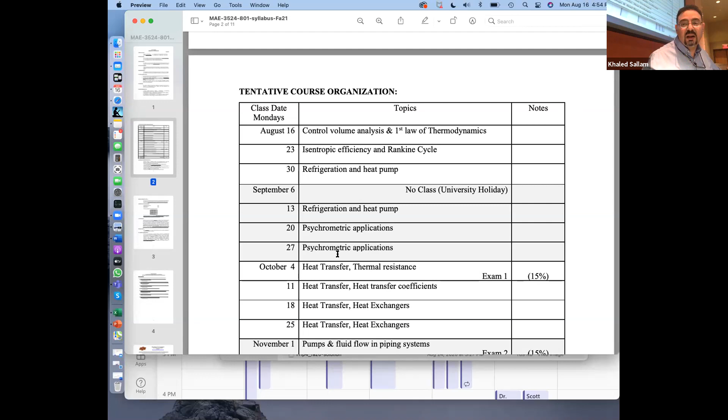So here is our class schedule that I will try to stick to. There are dates here that you should put in your calendar: exam 1, exam 2, and the final exam.

You can see the exams are 45%. The quizzes and homework are 25%. And the design projects are 30%. So that makes 100%. My A is at 85, so if you are 85 or higher, you get an A. B is 75, C is 65, and D is 55.

So now the late policy, or what happens if you miss one of the exams, especially since we may get sick, or you may be working and have to travel. A lot of students actually have to travel sometimes. So if you miss any one of those exams because of sickness or travel, you just need to tell me ahead of the game, and you don't have to prove anything to me. You don't have to tell me, well, here's my COVID doctor certificate. I don't care. You just tell me you're going to miss that exam.

And what will happen is we will just wait until your next exam, and we will see what you score in the next exam. We will use the class average between those 2 exams to calculate your score for the exam that you missed. If you miss the second exam, we will use the final exam.

If you miss the final exam, we will just wait until you come back from the hospital, because that's the only reason why you would miss the final exam. And that actually happened once: a guy crashed his motorbike on the highway coming to the exam. So I gave him an incomplete in the course, and he came back a month later on crutches in my office upstairs.

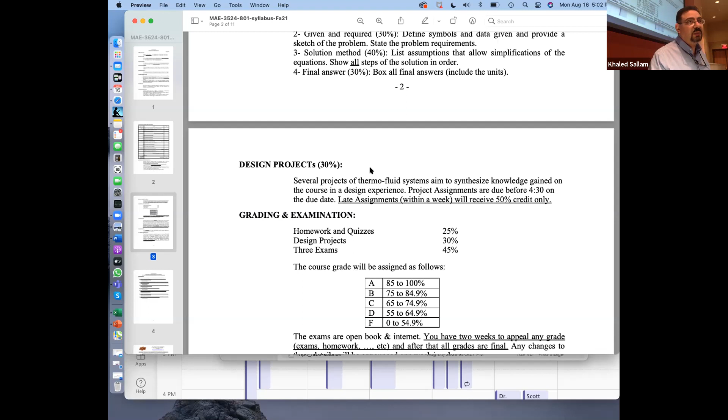So you will see that when I assign them, you will be able to see the deadline, right? So hold on, you will see it.

Okay, final thing before we leave the syllabus is academic dishonesty. So this is basically copying homework from other people.

I need to tell you that it's very, very useful to work with other people. It's useful to sit across from each other and discuss how you're going to do that homework, what equation to use. It's even good to, after you solve the problems, come back and ask your friend, what did you get for number 1? And you say 60%, and he tells you, I got 90%.

How is that possible? Show me your solution. And it's okay, he can show you his solution. And you say, wait a minute, what is that equation? All that is healthy.

The moment it becomes unhealthy is when he leaves the homework with you so that you can copy the right answer. It's okay for him to tell you, you missed this part, you have to do that equation. But it's not okay to leave the homework with you so that you can learn from it. No, you cannot learn from his homework, right? So you cannot do this.

And I am very, very fanatic about this. In many semesters I would send 15 people to the academic integrity office, and we'll have 15 meetings, and I'll spend 15 hours filing those forms and sitting in the meetings. In most cases, every student signed that yes, I did this, and it's staying on his record, because I only pick the cases which are slam dunk. So I give the student a chance, any benefit of the doubt, I say maybe he didn't do it. But the cases I pick, unfortunately every year, a lot of people get slam dunk copying from someone or from Chegg.

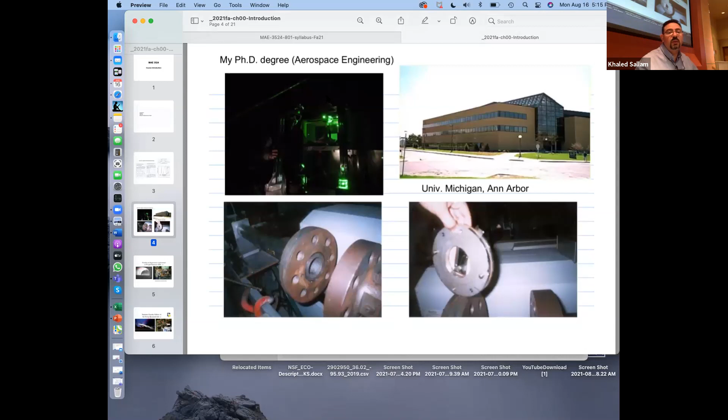And then for my PhD, I went to Michigan to do aerospace engineering. So that was mechanical engineering. And then I did it basically studying fuel atomization in high-speed flow, like jet engine, jet afterburner. And so we were using a shock tube. We will generate shock waves, and we will hit the fuel droplets with those shock waves and see how they disintegrate and what size they come up with.

And then after that I did my postdoc, which is like after you finish your PhD, you spend about 2 years doing more studies. That was at the Air Force Research Lab, that's their supersonic wind tunnel, and that's me with more hair and way younger. And you can see this is from my experiment, where you would send supersonic flow and send the fuel jets. That's really in the internal part of a scramjet engine, where the flow is moving supersonically, and you're supposed to inject and combust the fuel in supersonic flow. And all those optics on the table were because we were doing holography, taking 3D images of the spray inside the flow.

And then I was summer faculty in the Air Force for one summer doing work on scramjet engine. And then I came here in 2003.

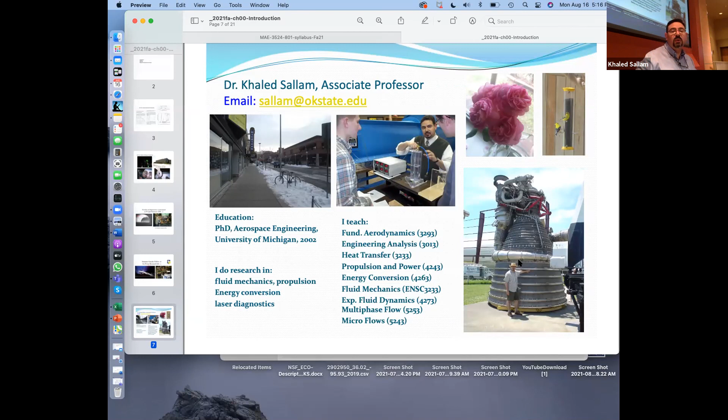I would like you to make something like this, a slide like this. This will be the first problem in your homework: one slide in PowerPoint that will introduce yourself to me. It has to have a clear picture of yourself, your email, whether you have an associate degree, and what you are interested in. Here I say what I do my research in. You would say what you are interested in, maybe your career job, what you would love to work on after you finish. Maybe tell me the courses you already had so far, and some cool picture of the things you like to do for fun. That would be an introduction of yourself to me, so I know more about you.

In this course, we will learn three things, basically three topics we are studying. So thermal fluid system, from our point of view, includes thermodynamics.

Cycles like this, all power plants, whether they are running with natural gas - this is like Jenks power plant in South Tulsa - whether they are running natural gas, coal, sun, or nuclear reactor, whatever the source of the heat, that heat is used to generate steam, and that steam goes to a turbine, then into a condenser, then a pump.

That steam cycle basically goes on and on. Every time you are turning some of that heat into work, and the rest of the heat gets rejected into the condenser, in the cooling water that goes into the river or into the cooling tower in the air. That's what defines the efficiency of a cycle.

So we need to learn how to plot this cycle on a TS diagram, how we can model it, how we can optimize it, how we can improve it. For example, why is the Jenks power plant efficiency 40%, but you go to the Owasso one, over like 20 minutes from here or less, and it's 65%? So why is this one 65% efficiency, and the one down south 40%? What makes the efficiency improve, and how we can make sure that our system is very efficient?

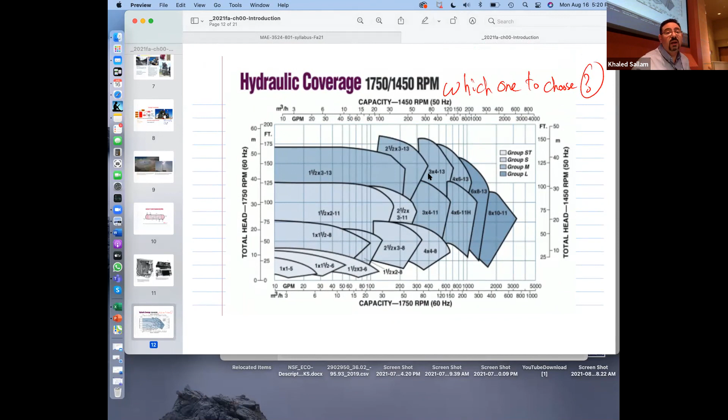The third part we need to learn is the fluid mechanics part, specifically pumps and piping for practical projects. If you are sending water through a filter system, coming back - maybe it's a swimming pool, maybe it's an aquarium, maybe it's just water going to the ground source heat pump and coming back - how do we pick the right pump, and how can we size it correctly?

Now, questions in class. I actually think questions in class are very useful, and I would encourage you anytime you think of anything to ask me a question, because there is no such thing as a stupid question. The chances are if you have a question, this thing is confusing, or I went quickly through that. Even if it was a stupid question, you will still do us a favor by asking it, because one, you give me a chance to catch my breath, and two, you make everyone feel good about themselves, because otherwise they'll think it's only them who didn't get it. So I welcome questions anytime.

The only thing that I don't welcome is interrupting me. So you wait until it's the time for question, then raise your hand, and I will tell you yes, you had a question, and then you can ask a question. Yes, go ahead.

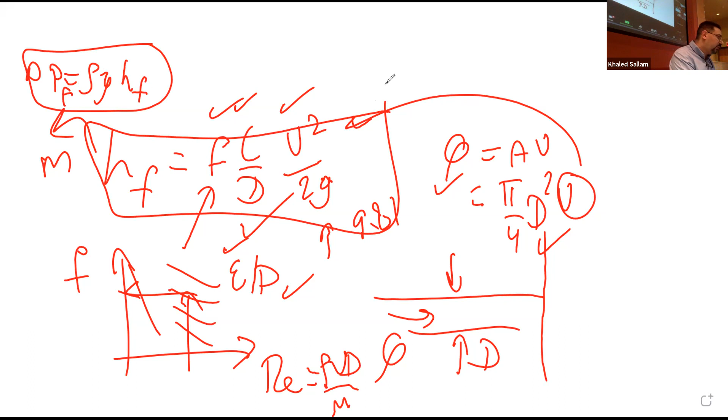Maybe remember a few things. This comes from here, maybe I need to remember the continuity equation. But that is a homework problem. So now what is a design problem?

A design problem would be: we don't know what diameter, we don't know what pipe. We don't know the diameter, we don't know the material. All we know is that they want to deliver the water from this place to that height, and they want you to pick the pump for it.

So there are choices here. What material? Should I make this out of gold? No, too expensive. Should I make this out of wood? No, it will not last, right? So you need to go and Google what do they make pipes of. And you would say, well, they do it with cast iron, they do it all the time, maybe other materials. Well, what is right now, is there PVC? Will it take that pressure? Let me try. PVC is cheap, cast iron is more expensive, but which one will take my pressure? You make a choice based on what is being used currently, right?

And then there's one part where you just have to be realistic when it comes to the diameter. Should I make it that small because that's really cheap pipe? Well, maybe if you are sending water from your garage to the backyard, you can go this small. But if you are sending it across the city from one reservoir to the city tank, maybe it needs to be a little bit bigger. How big should I make it? Again, you go to what is really practical, right? So there are things that depend on what is the state of the art, what material people are using. Maybe you wish there was something that will never rust and is so light and so powerful, but it does not exist. So you just pick the next available, right?

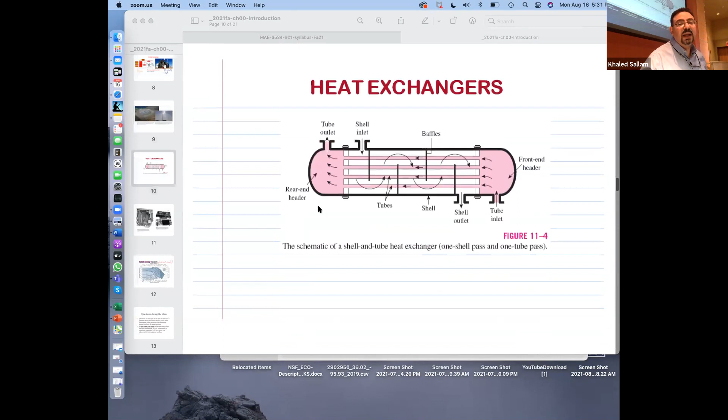But for example, if I make the diameter this big, yes, the pressure drop will be so small, but the velocity will be so tiny that probably this pipe will be filled with fouling film very quickly, because everything will deposit in it since there isn't that much flow rate into it. And besides, it will be really expensive. So that's basically the bottom line, that the problem is a little bit loose. Engineering design is a decision-making process.

That's the point, you have to decide. Of course, the more experience you have, the job becomes so much easier for you. I have one of my friends who worked in HVAC systems for buses.

And so it's very easy for him, you just tell him the bus size, he will immediately tell you what machine, what HVAC unit you need, because he did those exercises so many times. We are not there yet because you are still junior, but we are hoping that you get to that level.

So, the decision-making process draws principles from engineering and other fields, and the constraint on the system is not always efficiency or numbers you can calculate. Sometimes it's just, this is too expensive and I cannot make it, so we'll be happy with a cheaper option because it's affordable. For example, I know for sure that if my car flips, I'm dead, but I'm not driving a Hummer because it would be way too expensive. So I made a decision that if I drive safe enough, the chances of flipping my car would be small enough that it's safer to have this one. So economic, safety, environmental impact, for example.

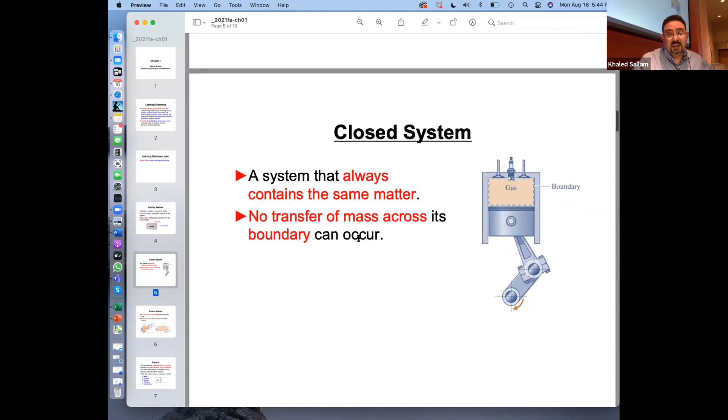So here's an example of a closed system where the gas is basically contained. Energy is released from the combustion, and that energy transfers into work by pushing on the piston. So heat transfers to work, and some of that gets dissipated to the wall as heat rejection. But no mass crosses the boundary of a system, that's what a system is. A control volume is when things continuously come in and leave, fuel and air come in and exhaust leaves, so that becomes a control volume.

Very good. So properties of the fluid, the working fluid or material, are mass, volume, energy, pressure, temperature. Some of those are intensive, they are, no matter how small you divide the system, you still have the same temperature. But the mass is not, like if you cut them into half, the mass divides into two halves.

So specifically for steam, we can define the state just knowing two properties, right?

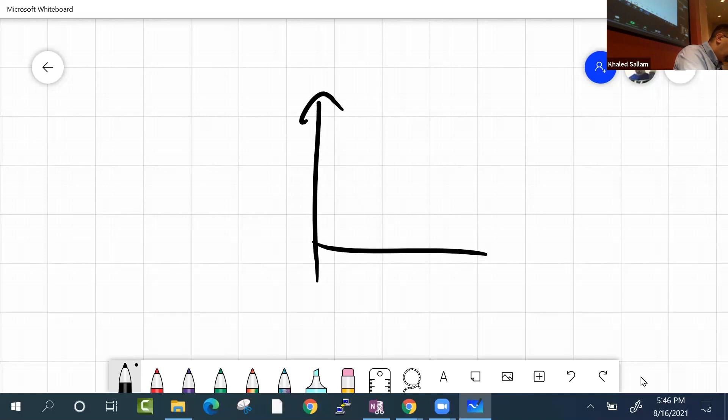Everyone knows what a TS diagram is, right? In case you don't remember from Thermo 1, the TS diagram of water is like this. This side is saturated vapor, and this side is saturated liquid. A liquid at room temperature, which is about 20 degrees C,

and atmospheric pressure, which is how much? 1 bar. This is 1 bar, will exist here in this place. So if you are existing in that region, you are not saturated liquid yet, you are not hot yet. How hot does water need to get in order to boil? 100 degrees at 1 bar, right?

So this point over here is, sorry, 100 degrees C. So at 20 degrees C, you are here, and at 100 degrees C, you will be here. And then if we keep heating you more, what will happen?

You boil, you start moving in that dome. What happens when you move in that direction? What changes? Your X, your quality, right? So the quality here X is 0, and the quality here X is 1 along this liquid, the saturated vapor line.

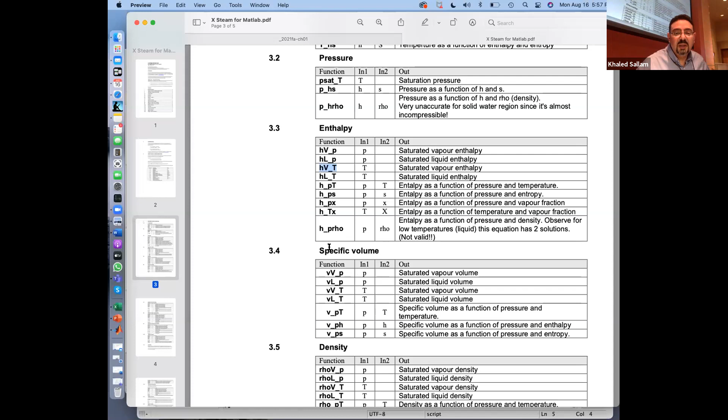So now this is always there for me, and I can make it bigger, I can add to it, I can use it later on. Okay, so you can see how he's calculating different things. He's calculating the quality from the pressure and the enthalpy. He's calculating the entropy from the pressure and the enthalpy, right? What if I want to calculate other stuff? I just refer to the manual, looking at all those codes. This is the manual of Xsteam, and it's on our Canvas webpage.

So for example, if I want to calculate things for saturated liquids or saturated vapor, let's examine, I want to use this, calculate this H. What is that H called? Did we call it HG or HF?

Tell me, you have seen the TS diagram before in Thermo 1. You did, right? Yes? Many years ago, I know, but you have seen it. So you should remember, was it called HG or HF? HG, good job, HG. So this is HG and this is HF. Right? HG and HF.

For saturated properties, you only need one property—you don't need both pressure and temperature. It's enough that you know the pressure. So for any pressure, whether it's 1 bar or 10 bar, you can calculate this HG or HF. Same thing for entropy or specific volume. You get those saturated properties just by using the pressure or the temperature. So how does MATLAB do this?

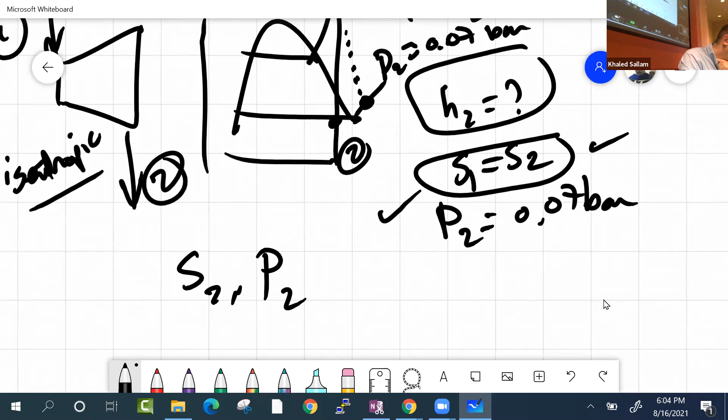So the first property—say the pressure, P2, is given as 0.07 bar or something. So given P2 is 0.07 bar, and given that S1 equals S2, S1 will be given from doing stuff on the top. So now we have S2 and P2. So how do you know whether that state is inside the dome or outside—whether it's wet or superheated? How do you do that?

Say that again—I don't have H2 yet. So the whole goal is to find H2. The only thing I know is S2 and P2. The reason I want to know whether I am inside or outside is to calculate H correctly. So how do I know if I'm inside the dome and wet, or outside and superheated, from this S2 and P2? That's the only thing you know—how do you tell from S2 and P2?

Using the table, Nick is saying. How can I use the table to find if I'm wet or dry? What part of the table should I use?

The steam table basically has pages for different pressures. Let's say there's a page for P2 that says P2 is 0.07 bar, and then the rest of the page is degree C, with several lines. This is the superheated steam table. So you basically say, here is 40, here is 60, here is 80, and you get all the other properties.

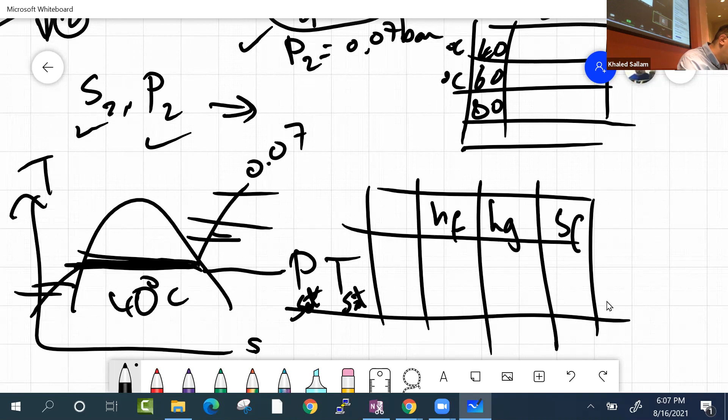For that P and T, they call them not just any P and T, they call them P saturation and T saturation. Then you will have HF and HG, SF and SG, UF and UG. Those are the two extremes, liquid and vapor, of each one of them.

And if that table is really nice to you, he will also do HFG and SFG. What is HFG? It's HG minus HF. He's so nice he doesn't want us to even do the subtraction ourselves, he will substitute it for you, because we're going to use that number so frequently. So he's like, let me just give it to you.

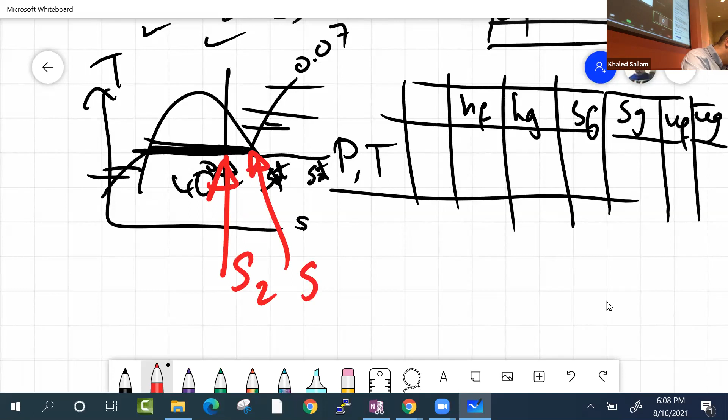Okay, so knowing that those things exist, back to our question: how? You compare your S2 that is sitting over here, hopefully, with SG and SF.

You will see if S2 is bigger than SG, then you are superheated, or if S2 is smaller than SG, then you are wet. Is S2 even smaller than SF? Maybe you are actually here then. So this region we call it what?

Inside you are saturated, over here you are superheated, and here, if you are to the left of the curve, you are cold.

What's the name for this region? It's called sub-cooled liquid, or compressed liquid, either one.

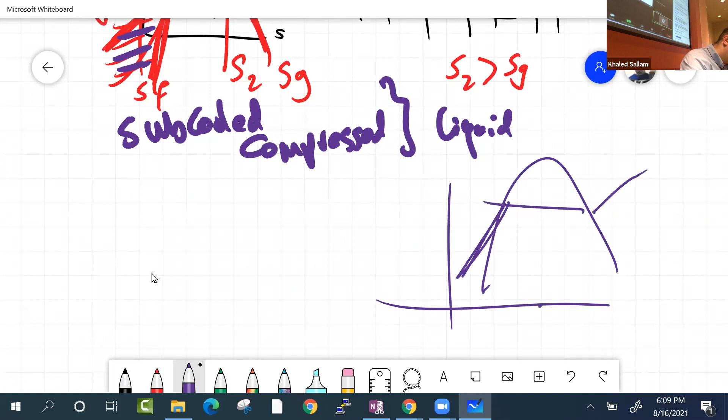Why do they call them that? Because at this pressure and temperature, you're supposed to be here. But if we take you from this T saturation that corresponds to your pressure and put you here, we cooled you. You end up being in that place.

For example, at 1 bar, if you are at 100 degrees C, you are saturated liquid. But if we put you at 40 degrees C, you are subcooled. You are not saturated, you are actually subcooled. So the thing in that region is called subcooled.

And why do they call it compressed liquid then? For the same reason. If you are here at 1 bar and 100 degrees C, that makes you at this point, saturated liquid. What if we increase your pressure, and put you at the same 100 degrees C but at 10 bar? Where will you end up? You will end up here. So that is compressed liquid.

Liquid with pressure higher than, or liquid with temperature lower than T saturation, either way you end up going into that subcooled liquid region.

Now, the last thing I want to say about this subcooled region is that when I'm plotting the pressure over here like this, at different pressures, a pump will take you from here to here, and another pump will take you from here to here. This is exaggerated so much. Those lines on the subcooled region are actually so close to that line.

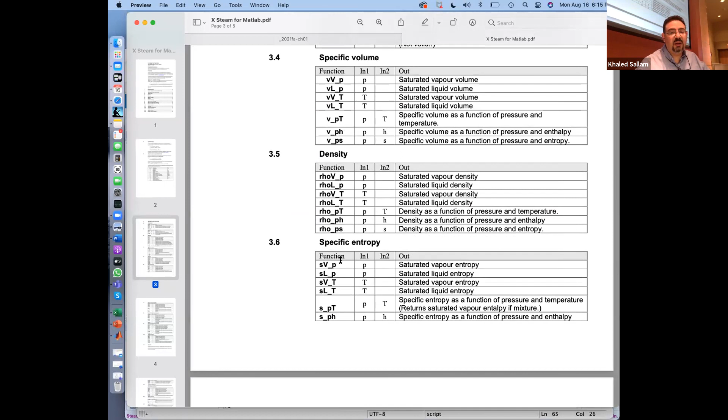So do we need to memorize all this? No, we just need to know where the file is, and every time we need a property, we come here and ask ourselves: what do I need? Do I need the density? It's rho. Do I need the specific entropy? It's S. What do I know? Do I know pressure and temperature? Then I'll use this. No, I don't know pressure and temperature — I actually know pressure and enthalpy, for example. Then I'll use this, and give it the actual numbers. I always look at that.

Not just you — a lot of people. I had really good students confess after the course that they had no idea what a TS diagram was and didn't know what saturated liquid meant. It's never wrong to ask about anything you don't know. What's wrong is not solving the problem. If there's anything you don't remember, chances are half the class doesn't remember either, and you'll do everyone a favor by just telling me, explain this better, I don't remember that part, I don't know how to do it.

Can you explain it? So all I want you to know at this stage is that the boiling or condensation of liquid happens along a constant pressure line in the boiler. This section we call the subcooled section, this is called the wet section, and this is called the superheated section. We will solve a lot of problems over this. For now, it's enough to know that you need temperature and pressure to define this point. Once you know that point, you can use those two properties to get everything else: enthalpy, entropy. We will solve problems over them today.

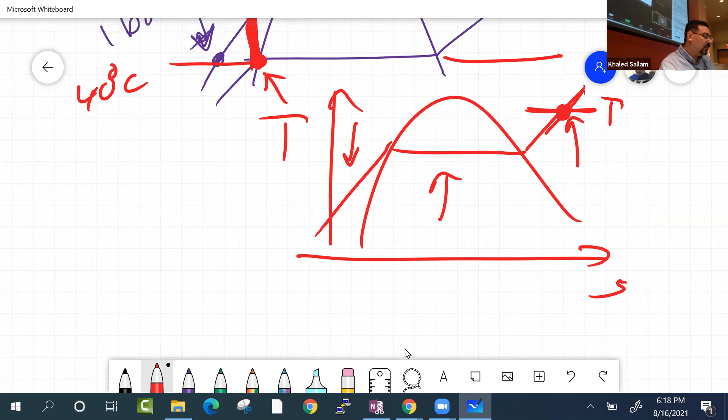Your homework will be to get the value here in MATLAB, for example, and use it to calculate, say, the work of a turbine or something. We will see that, right? So on the TS diagram, two properties are enough to define a state.

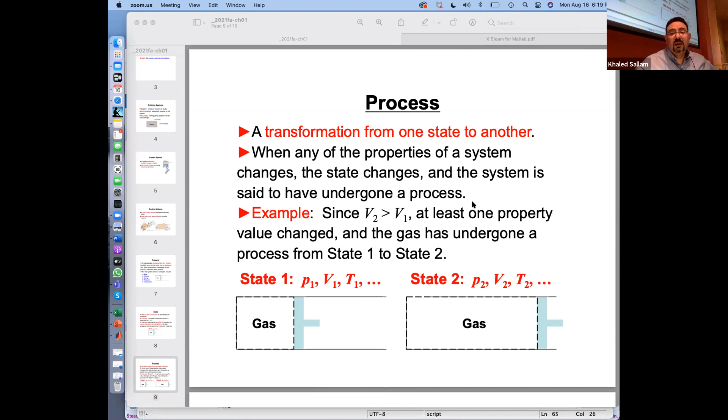All right, so now that process, whether we expand in a turbine or heat in a boiler, that's called the process. Some processes are called isentropic if they are vertically downward on a TS diagram. Some processes are constant pressure, isobaric, right? So the process defines the path on the figure.

Extensive property and intensive property. Extensive property depends on the mass, like the total energy. If I have all this, it will have one amount of energy, but if I divide it in half, the joules get divided. But intensive properties are things that no matter how small you fracture the material, every part still has the same value.

Equilibrium is when the system stops transferring from one state to the other. Once all the heat transfer happens inside the system, then it's in equilibrium. Its pressure is not going to change anymore, its temperature is not going to change anymore. And when the system is in equilibrium with the surrounding, then nothing happens between it and the surrounding. It's not going to get heated or cooled from the surrounding, not going to expand or get compressed by the surrounding. You basically reach steady state. That's equilibrium.

The units - never mix and match units, right? A lot of students, you'll be surprised how many lose their A because of units, because in order to get an A, you have to get your answers correctly. So usually it happens because you mix the units, especially things like kilojoule and joule - don't mix. So you stick with joule; meter and centimeter doesn't work, right?

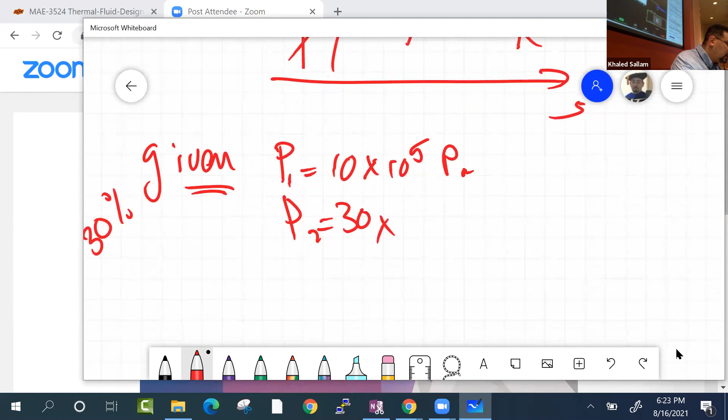So by putting this section, you are forcing yourself to decipher the problem statement: you would say P1 is... and if it said 10 bar, I would say 10 times 10 to the power 5 Pascal - what is going on, 10 to the power 5 Pascal. So I wouldn't write anything in kilopascal, for example. If you say P2 is 30 kilopascal, I would write 30 times 10 to the power 3 Pascal. If the temperature is 200 degrees C, I wouldn't write degree C - what should I write instead?

The temperature should be in Kelvin, the pressure should be in Pascal. If he gave me any length, like in centimeters or something, I immediately convert. I mean, I don't have to multiply or divide, but I just have to write it like this, so I remember.

There was a really funny incident that's still stuck in my memory from when I was doing my exam one year. He was giving us the pressure, P1 is like 30 kilopascal and P2 is 20 kilopascal. Of course, I wouldn't write kilopascal, I would write 30 times 10 to the power 3, and 20 times 10 to the power 3.

While I was reading the problem and writing this, I knew it was isentropic expansion. What's isentropic expansion? When you drop like this on the TS diagram. So if you have a gas going through isentropic expansion, you go vertically down. Isentropic expansion means S1 equals S2, right? No change in entropy.

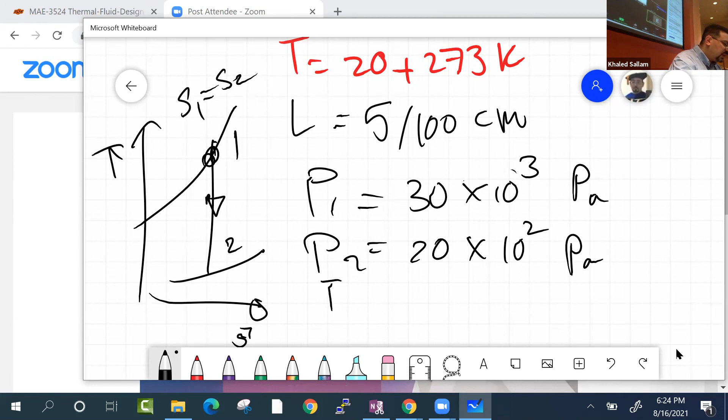He was giving us T1, 20 degrees C, and asking for T2. So I knew I'm gonna use that ratio thing: T over T equals P over P to the power gamma minus 1 over gamma. You remember that part? In isentropic expansion of a gas, T2 over T1 equals P2 over P1 to the power gamma minus 1 over gamma. And I know the pressure is gonna just be the ratio.

So it doesn't really matter whether it's in kilopascal or Pascal, because the units cancel. But when I was writing what's given, I was telling myself, you know, it wouldn't matter, right? And then the other part of my brain said, shut up, we said we're gonna stick to SI, we'll stick to SI.

Then in the solution, I was like, T2 over T1 is P2 over P1 to the power gamma minus 1 over gamma. And I was like, are you crazy? Are you actually gonna write it down? And I said, yes, I'm gonna do this. Shut up. So I'm doing this, pulling my calculator, and I still remember that conversation because it took a lot of my brain power at that time.

I was like, so are you really gonna multiply by 1,000 and then divide by 1,000? You completely lost your mind. And then I said, no, I'm not, but just, I'm gonna cancel over here. But we said we're gonna stick to SI, let's stick to SI. So I was religiously sticking to never writing anything in my answer sheet except in SI.

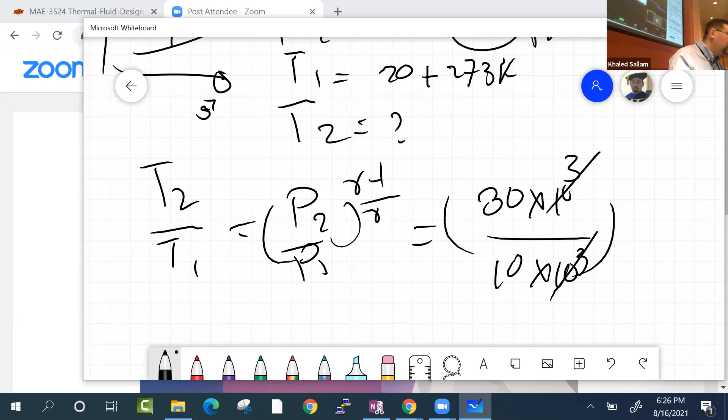See, I wouldn't have made this mistake if I was working for them. So it really pays to stick to consistency, though sometimes it's not that clear, for example with the English system. Of course, to start with, you can use English units. I'm not just saying let's use SI, but let's be consistent. So I can use pound force, I can use feet, and I can use slug. If I stay with those units for force, length, and mass, I'm fine.

What's not okay is pound mass, don't use pound mass. What's not okay is PSI... is PSI okay? Pound per square inch, is that okay to use for pressure? Yes or no?

Is that standard? No, it's not. Pound per square inch is not. What should I use then? I should use pound per square foot, right? No inch, no centimeter. Meter or foot, right?

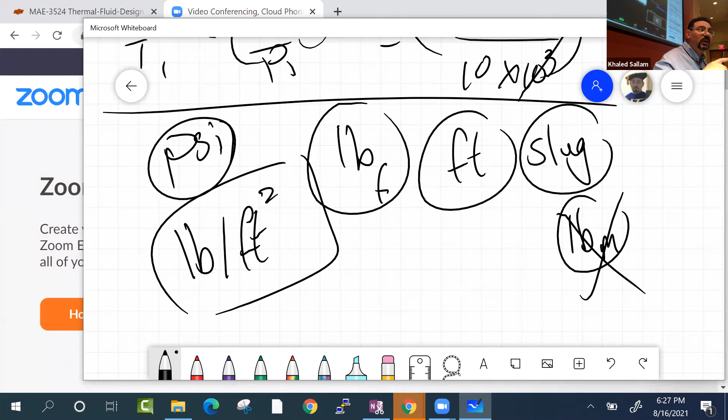Pound force or Newton. So you stick to one family of units, but you stick to the standard units of them, and you will be okay. All the equations will work, right? But you don't mix and match, and you don't use millimeter. Even if the number is really silly, say the length is like 5 millimeters, do you really have to multiply by 10 to minus 3 to make it meter? Yes.

Okay, so back again to solving the problem. So when you write what's given and what is required, you get 30%. And this will be graded on a scale of 1 to 4. So 1, if you miss them, you still get 1. 4, if you do them correctly, you get 4. 3, if you miss one of them, and 2, if you miss a lot of them, I guess.

The reason also why you need to write what's required is because a lot of the time people just read the problem so quickly and don't remember or don't notice everything that's required. I remember one of my students, he was really good, very good student. In the final exam, I usually give 3 problems, but that particular year I gave 4 problems and he didn't even flip the page to see there was one more problem. He lost a lot of points over it, but I just cannot forget that. So reading what's given and what's required in every exam is really important. Take your time and write them down.

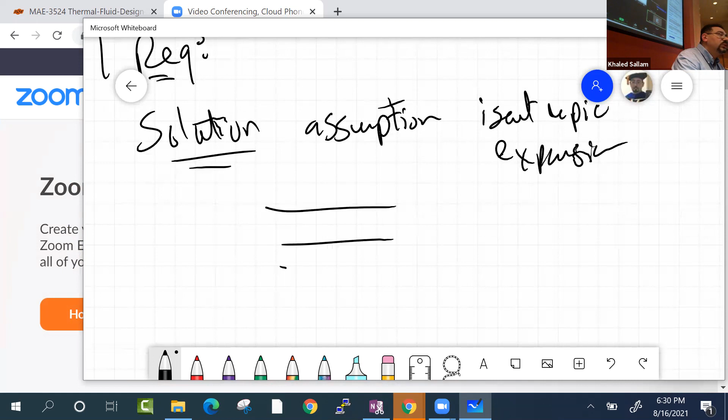And that will be worth 40% of grading any problem. And finally, the final answer that you're going to just put over here, say the efficiency is 0.4 or P2 is 40 kilopascal. Of course, the unit over here is the unit that the customer is asking. If the problem says calculate this in degree centigrade, you don't say no, I'm going to calculate Kelvin because degree centigrade is not standard. No, you do the calculation in Kelvin.

But then when it comes to the final answer, you just convert. The same thing when we do any project for any company: we do our thing in SI, but then if they want the thing in horsepower, we convert at the end to horsepower. Just divide over 746 and it will get converted. But you do your calculation in SI, you convert at the last end. So that final answer is worth 30% of the problem.

So again, every one of those is graded on a scale of 1 to 4. So when you get your homework back from Beben, he will tell you problem number 1: 4, 4, and 3. So you said what's given, what's required, you did the right equation, but the final answer was slightly wrong. That's why you got 3. If the final answer is not there, you will get 1. So you get, say, 4, 4, and 1. If the final answer is there, but it's totally wrong because you totally used the wrong equation, you probably will get like, say, 4, 2, and 2.

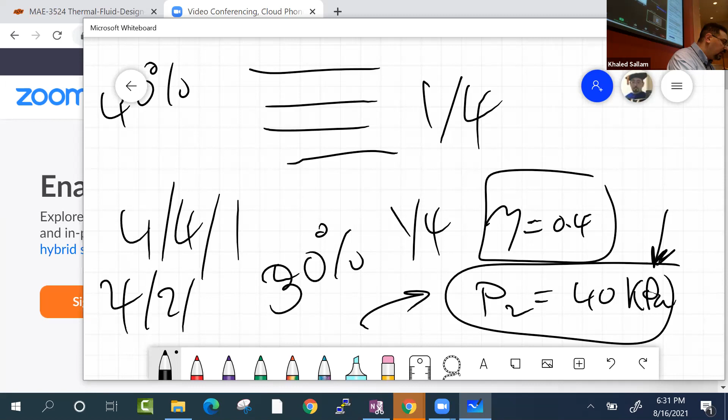Okay, so 4, 2, and 2, that means you have what's going on, what's given, what's required. You use the wrong equation, and that's why you end up with a horrible answer. 4, 2, and 1, you have the wrong equation, and you didn't even manage to get the final answer out of it.

Does this make sense? So when you look at this, it will end up showing that eventually, if you never really get the right answer, you get a B. And I think that's really fair. I mean, imagine if someone, for whatever reason, never gets the right answer.

You ask him, what's your phone number? He gives you the phone number wrong. Where do you live? He gives you the address wrong. I mean, we need to mark that person with something so that we can warn the outside world never to let this person work alone. That person needs someone to check his calculation. I mean, he knows the procedure, but we just need someone to check the number. So that's our B student, right?

And if you don't even know the correct answer, you don't know anything, you should get 4, 1, and 1. And when you calculate this, you will actually get a D. So 4, 1, and 1, what does that mean?

You are pretty good at English. You understand when someone talks to you, you understand what they want from you, right? But you don't know how to do it. That's why you get 4, 1, and 1. So you get a D, and you should work as an assistant in the office or something.

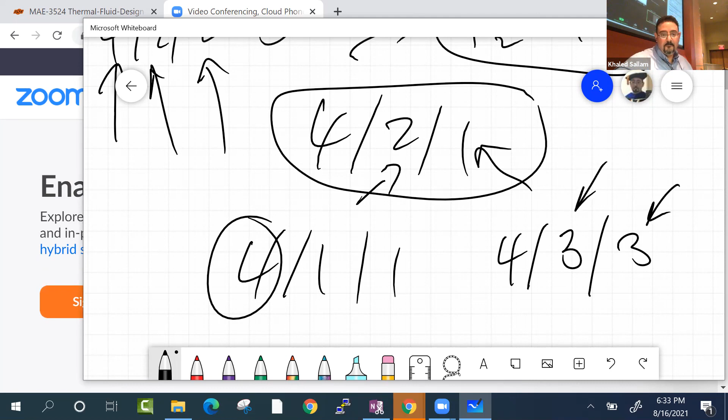Okay, the design project will be a little bit different, right? Because it will involve more requirement than just calculation.

Okay, so he's talking here about the different units that we should use. Pound, force is okay, foot is okay, right? Second is okay. In this English unit, in SI, of course, kilogram, meter, second, Newton. Make sense?

Pascal is the pressure, that's Newton per meter square. 1 bar is 100 kilopascal. And one atmosphere is how much? What's the atmospheric pressure? 1.01... Right, bar, 1.01325. So 1 atmosphere is a little bit bigger than 1 bar. 1 bar is 100 kilopascal, and 1 atmosphere is 1.01325 bar. So we use this, we don't use this. We don't use PSI, we use pound force per foot square.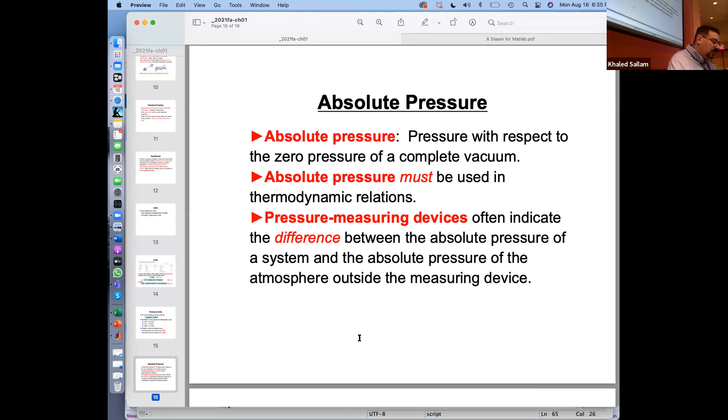Okay, absolute pressure and gauge pressure. I remember when I was a junior taking my fluid course, my only problem was, when do I use absolute pressure and where do I use gauge pressure? That was so confusing for me. So when do we use absolute pressure? When do we use gauge pressure?

When it comes to the equation of state, P equal rho RT, this should be absolute or gauge? Anyone? The pressure should be an absolute value or gauge. What is absolute or gauge?

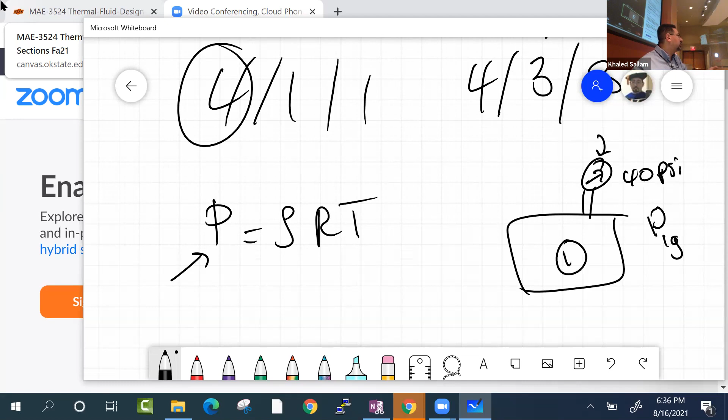For example, if I have a tank like this, and this tank has a pressure gauge, and that pressure gauge is saying 40 psi, that is 40 psi above the background pressure on that gauge. He's measuring the gauge pressure. So if this is P1, this would be P1 gauge. When you measure the pressure in your tire, it's 40 or 35 above the atmospheric pressure. So if there is absolute 0 over here, and this is P1, and this is P atmosphere, then this would be P1 gauge, above P atmosphere.

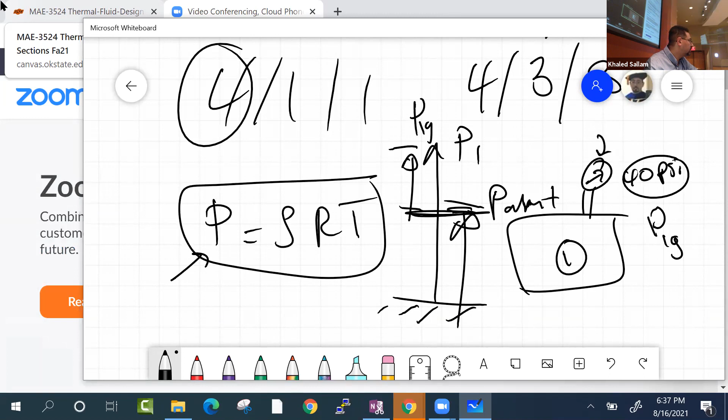So when this guy said that the pressure is 40 psi, and then you are using that pressure to calculate the temperature inside the tank using the equation of state, should I use the 40 psi gauge or should I add 1 atmosphere to it? Gauge or absolute? Absolute, yes. This has to be absolute. Why? Because the equation of state really cares about what is the pressure inside this tank. It doesn't care what is the pressure outside or how high we are outside. I don't care if we are at the bottom of the ocean or on Mars. If you have that pressure inside, the equation of state should tell you the temperature of the fluid or the gas, right?

So when it comes to the equation of state, when it comes to the TS diagram, when we are trying to say a turbine expanding or a pump working from this to this, that is the absolute pressure. When do I use the gauge pressure?

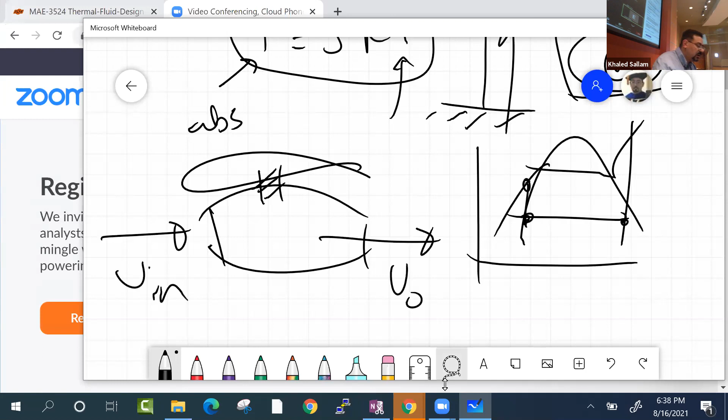For example, when I have a jet engine sitting under a wing over here, and the flow is coming like this and leaving over here, this is V in, this is V out, and someone is asking you to calculate the thrust of that engine. And what is that? You are trying to calculate the thrust equation, and you're saying that the thrust is m dot times V out minus V in.

But then you need to also add the force, it's not only the thrust, there is also pressure force acting on the control volume. This is my control volume. That engine is called the control volume. Things are coming, things are leaving. That's called the control volume, not a system. There's crossing the boundary. And the force that's acting on it is not just the thrust, but also P1.

I mean, let's call it P1 first. Then later I'm going to tell you we're going to use P1 gauge. So P1 area 1 and P2 area 2. Is that the only force that is acting, or do you see other forces that are there? Any other forces there too that I'm not showing on my sketch?

What about this? Isn't there forces here too? What are those forces acting on the engine's wall? Pressure force, right? But this is probably the atmosphere. There's probably the atmosphere everywhere, actually, including here too.

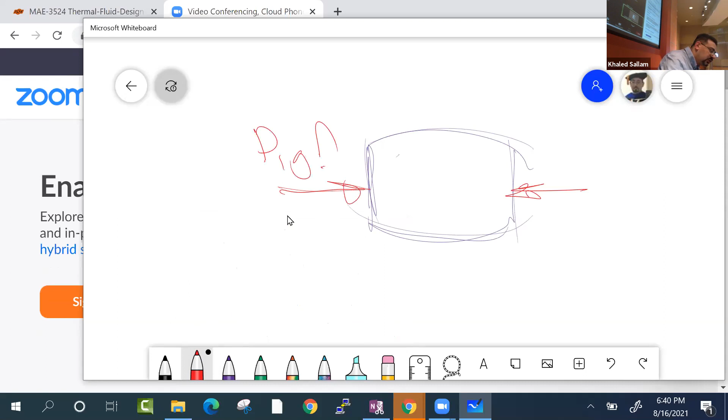So in our sketch, we will just plot things that are... we'll just measure plotting that are above the atmosphere. So we subtracted the atmosphere from everywhere. And here is V1 and here is V2. And here is the force coming from the wing, holding the engine.

And so now I define this positive direction and I write the momentum equation. I write the momentum equation for this, and I would say P1 gauge times area 1 minus P2 gauge times area 2 plus the thrust equals m dot times V out minus V in.

Okay, and that's how I can calculate the thrust. So we use gauge pressure when we are trying to cancel the atmosphere from everywhere, then we use the pressure on top of the atmosphere.

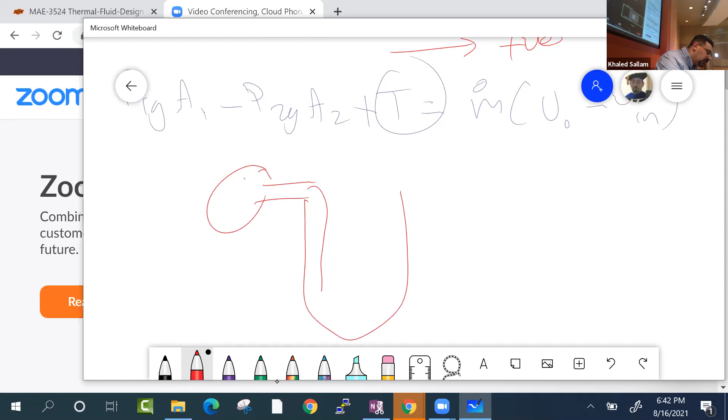Also, like in a manometer problem too. Imagine if you have a pipe like this, and then you are measuring the pressure with a manometer over here, and it's like that. So when you calculate that pressure difference, say this height is h, you'd say P1 gauge is rho*g*h, because you are measuring it with respect to the atmosphere. One side is open to the atmosphere, and you are measuring it with respect to the atmosphere.

So absolute pressure when it comes to thermodynamics, gauge pressure when it comes to forces. Then we cancel the atmospheric pressure.

So I'm explaining here gauge and vacuum. The vacuum is opposite to the gauge pressure. The gauge pressure is how much you have on top of the atmosphere. The vacuum is what you have under the atmosphere. So when someone says the pressure in this tank is 25 inches mercury vacuum, that means I am lower than the atmosphere by this much.

When does the pressure get lower than the atmosphere? Condensers, for example, in a power plant, because they want to condense at low temperature, that necessarily means you have to use vacuum.

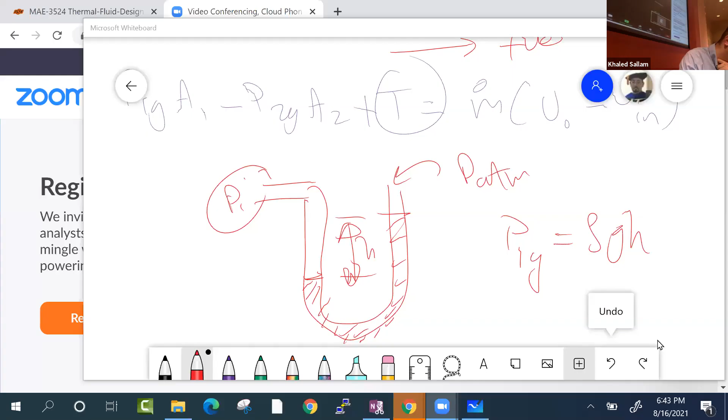Maybe we should cancel this so it can get bigger. We should cancel this, should make it on top.

Yes. So the regular power plant, the Rankine cycle, it operates on a boiler that takes you all the way up to here, a turbine that takes you down, even down here, and then a condenser that takes you to subcooled liquid, and then a pump that takes you up, and it keeps going like this. So for the turbine to go from say state 1 to 2, that work turbine is H1 minus H2. So to get this guy as low as possible, they need to take that temperature down.

Again, this is a T-S diagram. They want to take this as low as possible, say 40 degrees C. How low can it get? It gets as low as the cooling liquid that is cooling the condenser tubes.

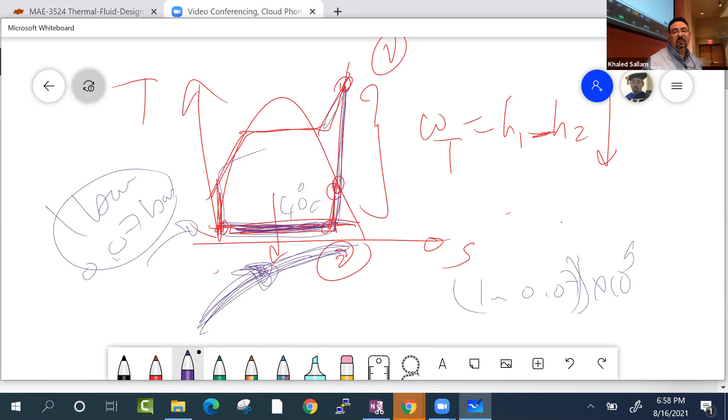So the condenser will be under vacuum, right? And they can calculate this vacuum by measuring P atmosphere minus P vacuum, okay, the absolute value of the vacuum. And that difference can be expressed in kilopascal, or it's standard to actually use mercury, inches of mercury or something, right? Or torr, they also use torr, which is a unit of pressure. So gauge pressure is above the atmosphere, vacuum is lower than the atmosphere, okay?

And we said that a good idea is we can get it from X steam if we don't want to use a steam table, just by telling it what we need, P saturation that corresponds to that temperature, right? That is the line that we should use. So over here, if we say what is the pressure that correspond to... what is the pressure that correspond to... let me make this bigger.

You guys can see on the screen, all right? At that temperature, I'm going to say 40 degrees C, right? And I have to add the semicolon so that you don't actually print. If you put the semicolon, it means execute, but keep the variable in memory, don't print it to the screen, because this is part of a bigger thing that I'm going to calculate. And then at the end, I just need to know the efficiency. I don't like to print every single line.

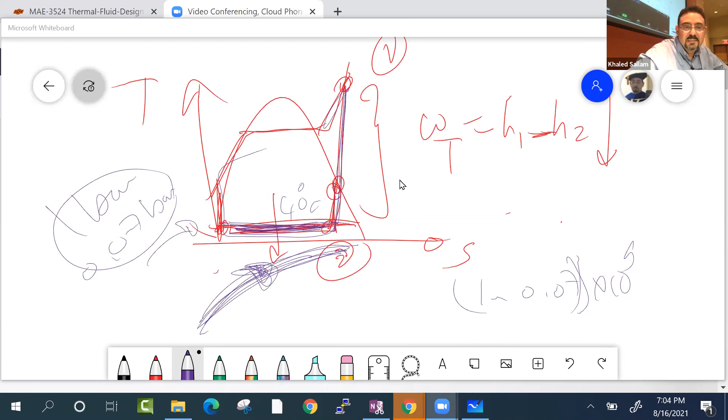Temperature scale — of course we don't use degree C in the equation of state, but when can we use degree C? What scenario is it okay to use degree C, guys? Well, so again, when we are using P equals rho R T, this has to be in Kelvin. There is no choice. But when can I use degree C in my temperature calculation?

When we are what? Yes, when it comes to delta T, that is correct. So for example, in heat transfer, if you remember the heat transfer course, Q for convection was like HA delta T, right? T liquid minus T ambient, right? So over here it does not really matter. People ask that question so many times — should we convert, like when we say T liquid minus T infinity, should we do this in degree Kelvin? No, it doesn't matter whether Kelvin or C.

But crazy as I was when I was undergrad, I don't remember that story — I just remember the pressure story because it took a lot of my time canceling the stuff. But I'm sure I was like, no, I'm going to use Kelvin, let them just subtract from each other. I don't want to get my paper spoiled by degree C. Very good.

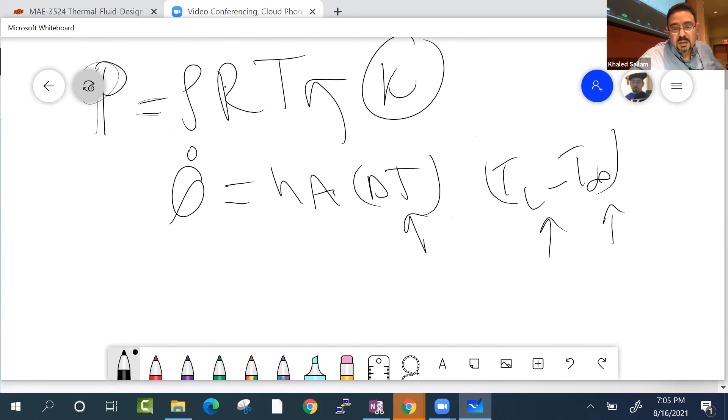Also, for degree Fahrenheit we actually use Rankine in the equation of state. And the conversion between degree Fahrenheit and degree C is super easy too. Degree centigrade is 5/9 of degree Fahrenheit minus 32. You subtract 32 and then multiply by 5/9. Or you just Google the conversion and you'll get the difference between them.

So we talked about the grading, right — about what's given, what's required, and the solution. But I would like to say something else about problem-solving skills. A lot of the time we convince ourselves that if I read the solution and understand what the instructor said, then I've got the problem. This is as if someone who read a book thinks he can write a book. The fact that you can read the book, understand it, and it's very clear what it's trying to say, doesn't mean you can write a book.

So why I'm saying this, it's not good enough to solve the problem. You have to always come up with a solution yourself, okay? Because it's the solution methodology, it's the reason why you went that way. That's what you carry to other problems, because you will never be asked to solve this exact problem over and over again.

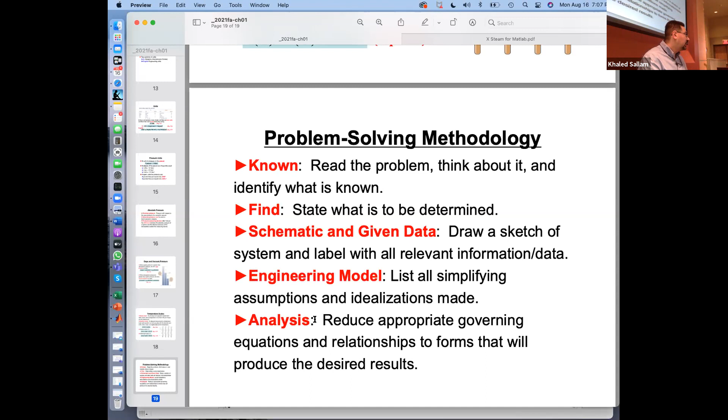But maybe in your senior design project, you will be asked to do something that involves energy conversion, and you would remember, I did this method in this homework problem because energy was conserved, it just changed form. We said those joules equal to that joules. Then when you face a new problem that has the same physics, you will follow the same procedure.

Okay, so it's never the solution, it's the solution procedure. Okay, good. Question so far?

So the question for online people is, when you say required, when you're writing the problem and you're giving 30% on given and required, what is exactly what you mean by required? So to start with, given is straightforward, right? By given, I just need to see symbols and numbers. I want you to say this: P1 and T1, and rho 1. So one funny guy sometime, like last year, he was like, in given, he pointed to the problem statement, say the problem statement was on top, and he said, given, here, the problem is given.

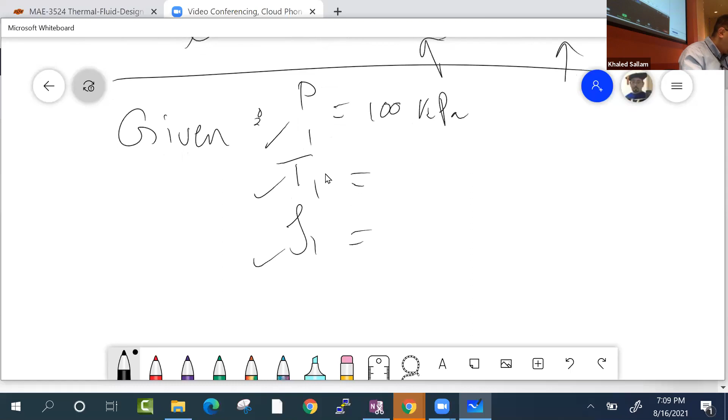No, I want you to spell out for me the numbers and the variables. Okay, so the same thing for required. I want you just to say required is the efficiency and say the overall heat transfer coefficient. It just shows me that. And maybe you want to say that the heat transfer coefficient is required in watt per meter square Kelvin, for example. So it just shows me that you know what is required. I mean, if you don't remember the symbol, you can always say the cycle efficiency, that's also acceptable.

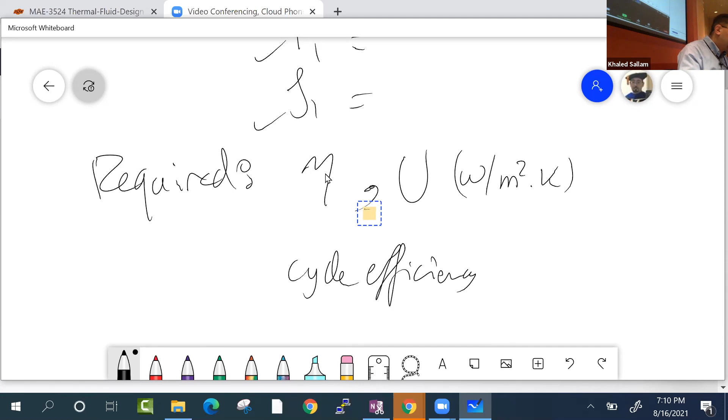But I don't expect you to say cycle efficiency if the system is operated at half the pressure. I mean, maybe that's the problem statement, we said calculate the cycle efficiency if the pressure is half. You don't have to do this, you just say cycle efficiency or eta. That's good enough. It's just a way for me to realize that you remember that there are 2 things that are required in this problem, and those are the 2 things.

Does this answer the question? It's what we are looking for. Exactly, that's what is required, straight out of the problem. You are not inventing it.

Is there a way you can find like an example of a simple homework problem? Yes, we're gonna do this. Definitely, let's solve the first homework together too, as a gift for me to show my goodwill. Okay.

We are not there yet, however. I wanna cover one more thing before we go there.

All right, so chapter 2 in the thermodynamic book, he talked about the first law of thermodynamics. That's probably the most important thing really in this course. We'll solve a lot of things just using the first law of thermodynamics.

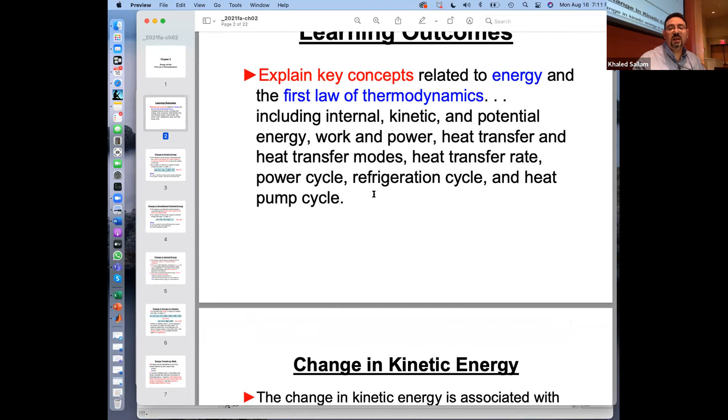Okay, so the first law of thermodynamics is simply an energy balance. It's like a budget balance for your house. How much money is coming into our budget, how much money we spend, the difference between them, if it's plus, that's savings going to the bank. If the difference is negative, that's debt that goes to the credit card. That's basically the first law of thermodynamics: joules coming in, joules leaving, and the difference is, are we storing stuff or are we losing from our control volume? Okay, and it helps with heat transfer, refrigeration, power cycle.

Okay, and so he's introducing the forms of energy that the first law is counting, or basically making a balance of. The first one is kinetic energy. Okay, so the kinetic energy of my mouse, if I throw it on you, is half mv squared, right? Half the mass times v squared.

But the kinetic energy flux going into a control volume is not just a sphere, it's a continuous flow. So if I have a jet engine or a pipe and things are coming in with m dot 1 and v1, then the energy flux is not half m v squared, it's half m1 dot v1 squared. Okay, so this would be kilogram per second, right? And this would be meter per second.

But you can tell then that v squared by itself, the unit would be joule per kilogram.

So when you multiply it by the mass flow rate, which is kilogram per second, you get joule per second. So the kinetic energy flux is in joule per second. Half mv squared, that is energy, that's joule. But half m dot v squared, that's what we use at the entrance of a control volume or the exit, and that is joule per second, not just joule.

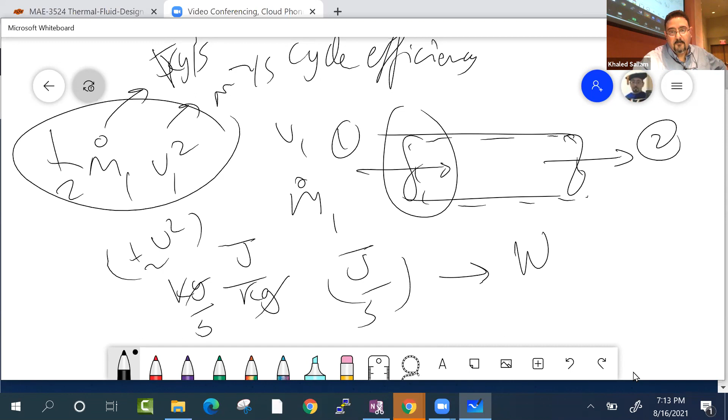Potential energy, mgz. This is the potential energy of this guy hanging there. So with respect to that datum, you have this height, that is potential. So when you drop, you lose that joules and you turn it into something else, like kinetic energy. That's why you accept that velocity.

But for a control volume, it's going to be m dot gz. And internal energy, we give it the symbol U. The specific internal energy, per unit mass, is small u, and that is joule per kilogram. For gases, that small u is CvT. For steam, we don't use CvT — we go to the steam table and get the internal energy knowing any two other properties: temperature and pressure, or entropy and temperature.

So the energy flux going into the control volume would be three things: internal energy, potential energy, and kinetic energy. And the stuff that leaves would be the same.

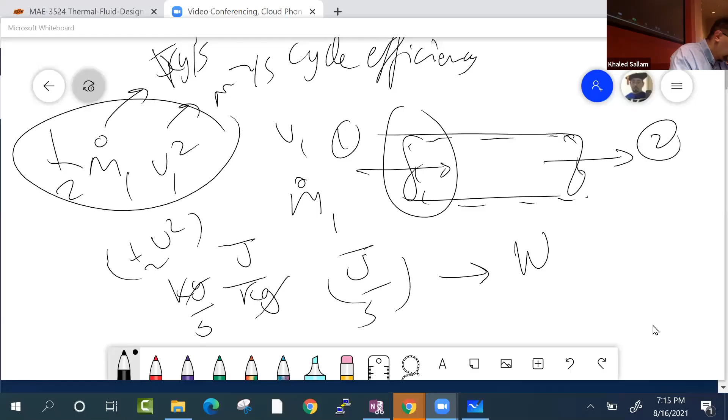So if I have a pipe, maybe a pump over here that is taking the stuff from, say, the river and sending it to a higher level over here — this is point 1 and this is point 2. And we are trying to calculate the first law of thermodynamics so that we can figure out how much power this pump consumes. To do this, I need to do an energy balance in that control volume.

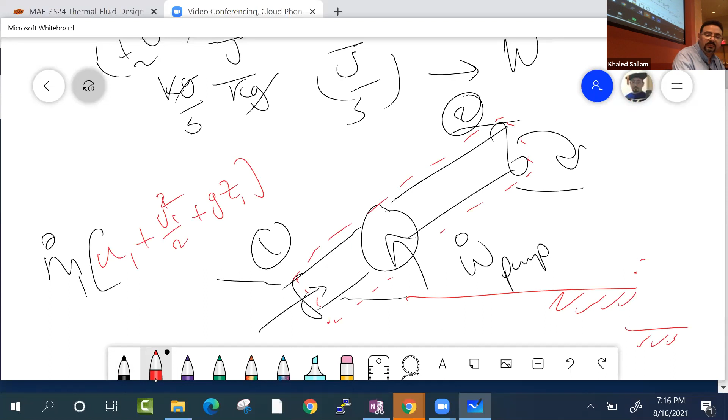I want to know what's the energy in, what's the energy out. So the stuff coming in here is m dot 1 multiplied by — I'm going to write it wrong first, it will change in a minute — U1 plus V1 squared over 2 plus gZ1. Z1 requires you to define what is Z equals 0, the datum could be here or there, you just have to define it. But the point is, this is in joule per kilogram, and this is in joule.

This is in joule per kilogram, and this is in joule per kilogram, and this is joule per kilogram. This is actually a good trick to remember: whenever you're writing a formula and things are added to each other, they should have the same units. So if you're deriving an equation and flipping from one page to another and you forgot the g, it's very easy to catch — just before you plug in the number, you check. I used to do that all the time, so I would derive my final formula, and before I put in my number, I'd check: does it really make the units the same? That's why I remember till now that meter squared per second squared is also joule per kilogram, because of how the first law of thermodynamics is written.

Very good. So those are internal energy, specific internal energy, kinetic energy per unit mass, potential energy per unit mass, and they are multiplied by the flux. The same will be on the other side. And if there is a difference between them — if the energy out is more than the energy in — it must be because of the power that the pump is doing. That is the point behind the first law of thermodynamics.

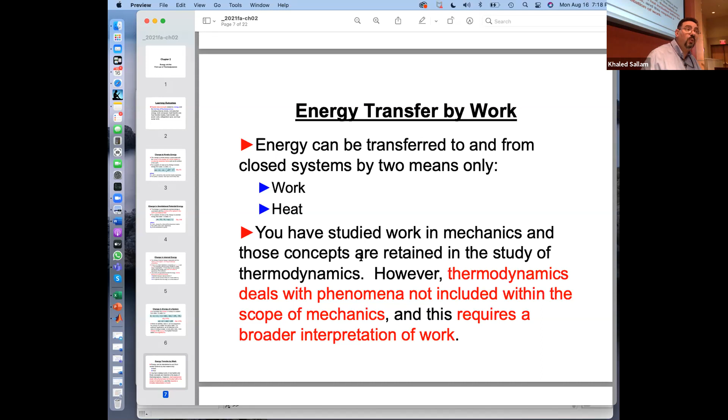So now that system, or the control volume, because it's open, can transfer work and heat to the surroundings. It can get heat from the surrounding, and it can give or take work from them, like a pump with electric power coming in. Some of the work could be compression, could be a fan, could just be electric wiring going into the control volume — bringing mechanical or electrical power in.

The sign convention of the first law is that when the control volume is actually doing work, like a turbine, the turbine does work on the ambient, on the surrounding. It has a shaft, and that shaft does work on the surrounding, which is the generator sitting outside, or the load. Then that work is a plus. So the system is useful when the work is plus, when the work is done by the system.

The opposite for the heat. The heat again can happen between the control volume, or the system, and the surrounding. We could heat the surrounding, or the surrounding can heat us. When the flow is coming to us from the surrounding, when we are being heated, that is a plus Q. The heat is positive when it's done to the system.

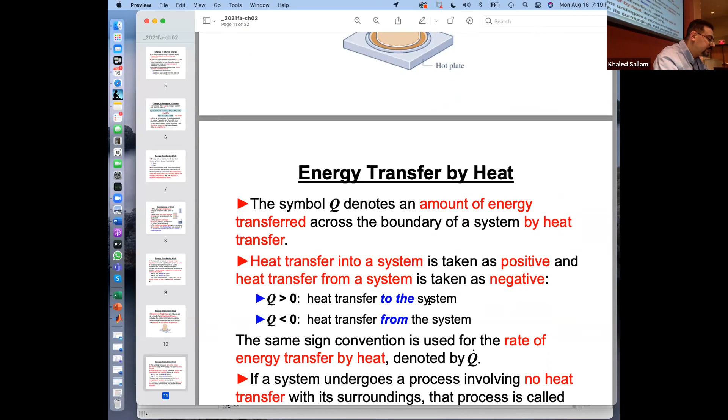So that is weird, right? You'd think because, like, you'd understand if everything going out is plus and everything coming in is negative, or the opposite. But no, they rather have it like this. If you have a control volume, then when you do heat on it, that is positive. And when it does work, that is positive.

And as a result, the first law of thermodynamics says Q dot minus W dot equal to... So Q dot minus W dot, that is the net energy. Q dot minus W dot is the net energy delivered to your bank account, right? Q dot minus W dot is the net energy delivered to you.

And so that is the reason why your output, say the output is here, this is 2, and this is 1, the input. That's why you will have more stuff leaving than coming in, right? U plus V, U2 plus V2 squared over 2 plus GZ2, minus U1 plus V1 squared over 2 plus GZ1.

So the first law is basically saying that if you have a net addition to you, that's why the output will be more than the input. Or simply, if the output is way bigger than the input, it must be because you are being given heat, or someone is doing work on you. That's why the stuff is leaving with a lot more energy.

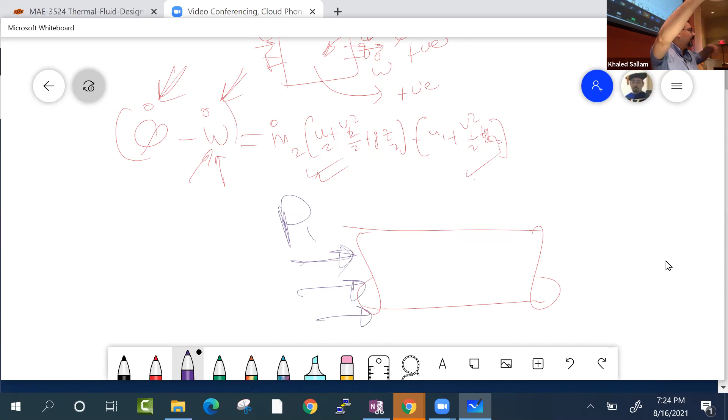But that officer is basically giving every student coming in energy. When you guys try to leave from the other side, I recommend leaving from here and coming from here, especially between two classes. But anyway, every time you're leaving, there's another police officer doing the opposite. Rather than pulling you out, he's pushing you in the face to prevent you from leaving. So in order to actually leave, the students in the classroom need to keep pushing on you so that you can get out, even as he keeps pushing back in your face.

And so everyone behind you, come on man, get out, and they're pushing you. So then we have to exert more to actually let you go out. So it takes energy for you to leave. That work by the officer at the inlet and the officer at the outlet is actually happening in front of your eyes, you just don't see it. And that is the work that you have to do against the pressure force.

Those Newtons sitting here, P1 is in our way and P2 is against us so that we can leave. That pressure force per unit mass flux leaving, if you want to calculate that, it will turn out to be PV, or simply P over rho. And the unit is joule per kilogram.

So the energy, it's kind of work in and out. But rather than putting it over here, they said let's not put it here, let's keep this W dot for real work, things that we can really see. Let's just add it here, P2 over rho 2, and let's add it over here, P1 over rho 1. And so the first law of thermodynamics then now reads.

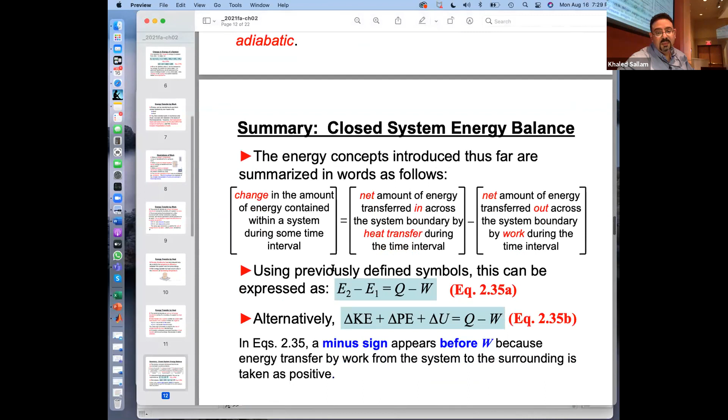Okay, so the first law would actually read H plus V1 squared over 2 plus GZ. This is for a system, you will have delta U. But for a control volume, he's explaining to us here what is that pressure force and what is the work done by the pressure force, and how it turned out to be P over rho, which is simply PV. And because of this, the first law would be Q minus W equal delta H plus delta kinetic energy plus delta potential energy.

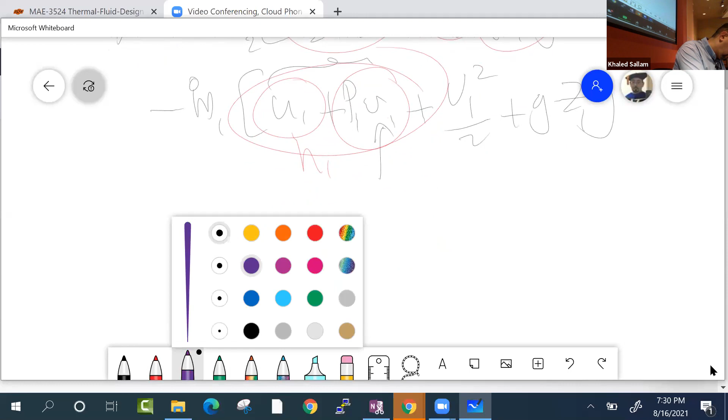So simply it will be Q dot minus W dot equal to M dot 2 times H2 plus V2 squared over 2 plus GZ2, minus M dot 1 times H1 plus V1 squared over 2 plus GZ1.

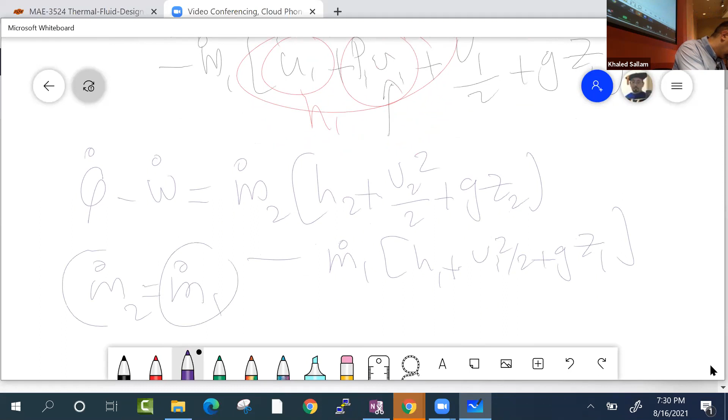Okay, and usually when it's steady state, M dot 2 equal M dot 1. Okay, and what if it's not steady state? What should happen? If it's not steady state, then it's like this: Q dot minus W dot is equal to partial T, the unsteadiness part. If there is a difference between what is coming and what's going, that difference will be stored inside the control volume. The control volume is building up his energy and building up his mass. So for example, M dot 2 should be equal to M dot 1, but if M dot 2 minus M dot 1 is not the same, that is partial T of M control volume. Make sense? So this is the unsteady continuity equation. The steady continuity equation is M dot 2 equal M dot 1. Mass coming in need to be equal to mass leaving. Otherwise, imagine if the flux coming in is not the same as the leaving.

Either the pressure will increase until we die from the pressure. It's like a James Bond movie, they increase the pressure not to kill us, or they suck the air and don't let anything in, so they put some vacuum, still the air will disappear.

Yes, but in most scenarios it will be controlled by this equation. The unsteadiness, the net difference between m dot out and m dot in, is partial T of the mass inside the control volume. So you use this when you're trying to empty a tank or something, that's what you will do.

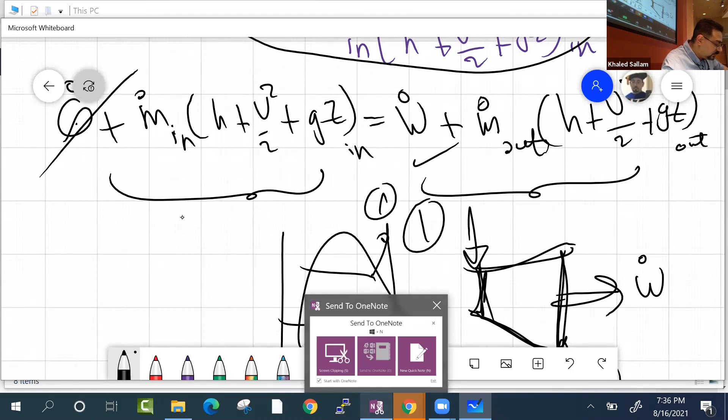The work is there, but the Q is 0. Why is the Q dot 0? Because the turbine, you're hoping it's isentropic, but for sure it's adiabatic. What's adiabatic? What does adiabatic mean? No heat transfer, right? No heat transfer.

And actually, when you go to an actual power plant, you will see that they wrap the turbine in thermal blankets so that they can keep it from losing heat. And you know how the pipes come from the top, they just make the blanket have a hole for it so the pipe can come in. It's like so cute, like a small puppy wearing a coat with his neck coming up. It's the cutest thing ever when you see the thermal blanket for the turbine. But the point is, Q leaving this tank is almost zero.

And the potential energy between the inlet and outlet is almost nothing. One, because it's the same elevation. Two, because it is steam, not liquid. Steam, vapor in general, density is very small, so the potential energy becomes very little. So this also gets cancelled when it comes to a turbine.

Never cancel this for a hydraulic turbine, for example, when we are doing a hydraulic dam, like Keystone. For the Keystone turbine, if you cancel the potential energy, what else do you got? I mean, the whole thing that's driving it is the potential energy.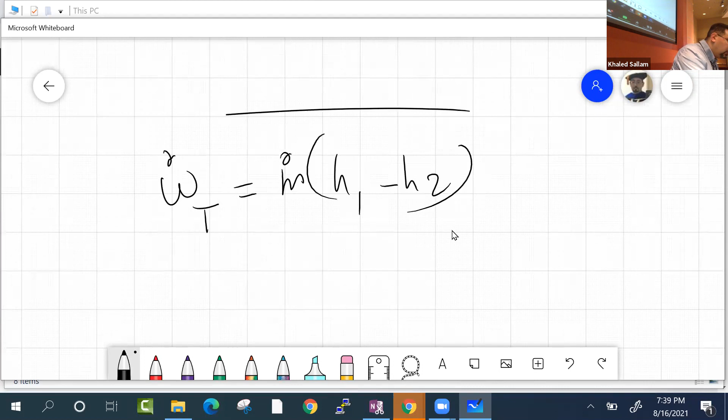Because in that problem, he actually is describing a nozzle, a converging diverging nozzle. And the point behind those converging diverging nozzles is what you think. So a converging nozzle will look something like this: the flow comes into a smaller area. That's like watering the yard with a hose, and you reach that corner in the yard, and you don't want to go because the hose cannot stretch. So what do you do? You push on it so that the area gets smaller, so that the velocity gets faster, so that it can go all the way to the end, right?

Because you are thinking AV equals constant. So you are telling yourself, if I just shrink the area, the velocity will shoot up because it has to have the same mass flow rate, same Q. This is annoying because Q is the volumetric flow rate in fluids, and Q is the heat transfer rate in heat transfer. Okay, so maybe we should call it V dot, which is even more annoying because a lot of people don't know what that symbol is. But anyway, it's just the meter cubed per second.

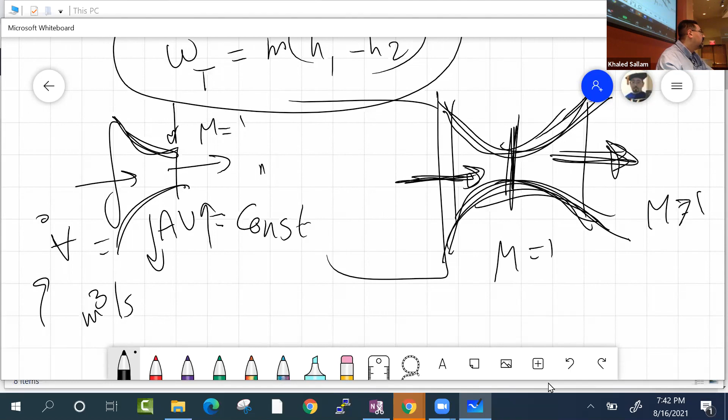Okay, so now in the first problem, if we are asked to analyze something like this and calculate the enthalpy at the exit, we're going to apply the first law of thermodynamics because this problem is all about energy.

Things are converting, changing from maybe high enthalpy over here to maybe high velocity over here. So when I write the first law, why did I think about writing it? Because I see the problem is about energy conversion, so my brain says I need to balance the energy. Energy in, energy out will give me a clue about the velocity at the exit, or the enthalpy at the exit, or the relation between them, because at the end of the day they need to equal the same amount of energy.

So when we do this, can we say, well, it's like a turbine, and let me neglect the kinetic energy and the potential energy? Can I use this equation, or should I go back to the first law of thermodynamics and keep the kinetic energy? I should keep the kinetic energy, because this nozzle is about a huge change in kinetic energy. This nozzle is created so that the velocity at the exit is way bigger than the velocity at the entrance, and when you square V, that becomes even bigger. So it's nicer to know the general form and simplify it for different problems, rather than memorizing or getting used to just writing the short version.

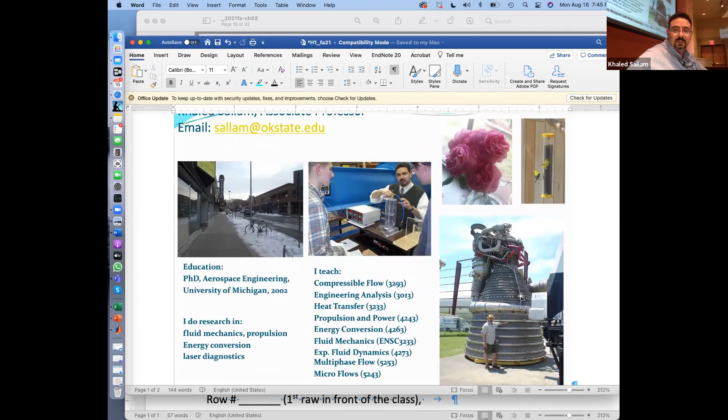So the second problem, here is the converging-diverging nozzle. By the way, the guy who invented this, De Laval, was a mechanical engineer who was fired by his boss before he invented this. His boss didn't think he was good enough, fired him, and he went on to create the converging-diverging nozzle. He also became very rich when he invented a cream separator, a machine that takes the cream away from the milk, and made a lot of money from that. He eventually came to the US, to Chicago, I think for a world exhibit or something, and showed his converging-diverging nozzle. Of course, this was also hooked up to a turbine, and the steam was turning the turbine at a speed no one had ever achieved before, because it was being hit by a supersonic steam jet.

So that nozzle is adiabatic. Adiabatic means Q is zero, but that doesn't mean isentropic yet. Isentropic is when it's not only adiabatic, but also something else. What makes adiabatic isentropic? It has to be adiabatic, and what's the second condition to be isentropic? Reversible. Adiabatic means no heat transfer, that's the first condition. We need something else besides no heat transfer to be isentropic.

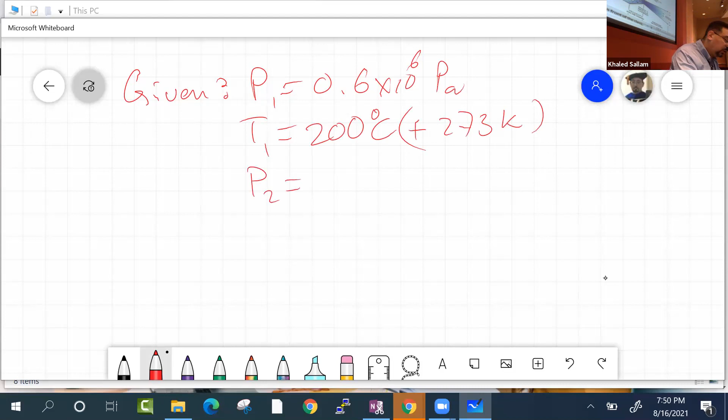So I'm going to start by saying what is given to me, and I'm going to say P1 is 0.6 times 10 to the power 6 Pascal, and T1 was 200 degrees C. I know that I'm going to use degree C because the steam table requires it, but just so my brain does not kill me, I'm going to add this. But we know we don't really need it, it just feels comfortable to me to do this. And P2 is 0.13 times 10 to the power 6 Pascal.

And V2... and V1 is 50 meters per second. And V2 is 600 meters per second.

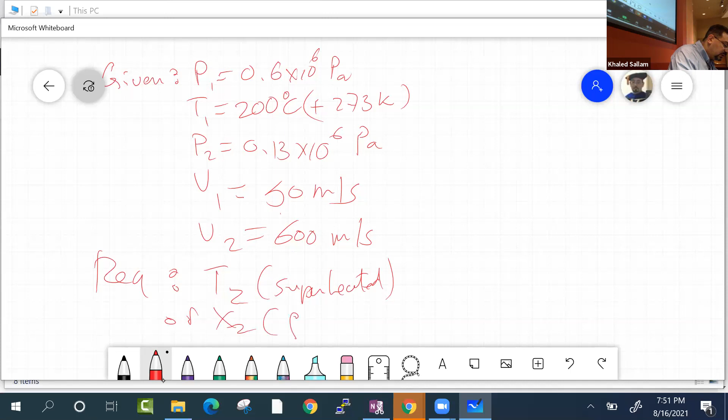That's what is given. Now, what is required? So what is required is, he said, find the temperature T2 for superheated, or X2 for saturated.

It makes sense to us. So when I plot this, I say 1 and 2, and T2 here is required. I could say that H1 is given. Is it? Kind of, right? Why is H1 kind of given? Yeah, because I have P1 and T1, that's all I need to get H1. And V1 is given, and over here V2 is given. And T2 is required. That kind of tells me what's going on.

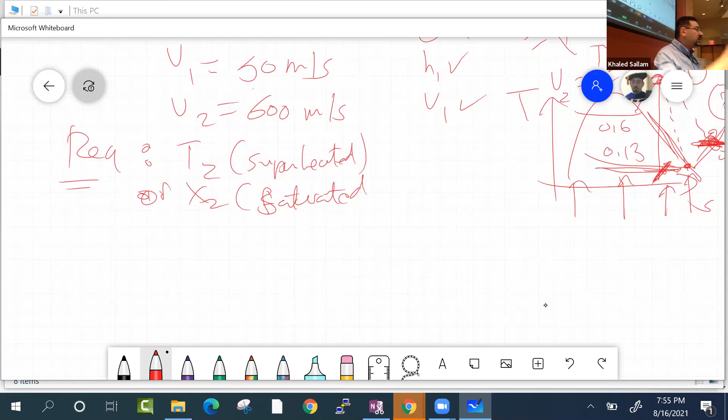Where are you in that place? So how do I calculate the X? What I always say is that problems need to be solved from the end, not from the beginning. Meaning that a lot of time when you look at the solution in a textbook, it's written like this: Step 1, H1 solution, and we would say, see that's why they have this plexiglass to save you from me, they would say H1 is H1 of P1 and T1.

Go to 0.6 megapascal and 200 degrees C and get yourself your H1, right? And then what? He will go to the, and you will read every line and you will understand every line. But that's not how your brain works or should work when you're solving this problem.

When you wake up in the morning, you don't just say, step 1, go to the restroom. You know, the Lego movie, everything will be fine, like when he was following the instruction. So I have 3 kids, so that's why I see a lot of cartoon movies. So you don't get up from the bed in the morning and say, step 1, take a shower, then get dressed, then have breakfast, then get the key, then leave and go to the job interview.

No, your work goes the other way. You would say, today I have a job interview. Let me get dressed really well. Okay, I need to wear this suit. I need to take a shower. I need to smell really good today. So we don't start by saying H1, and that's what I meant by you don't learn by just reading the solution. You have to come up with it yourself.

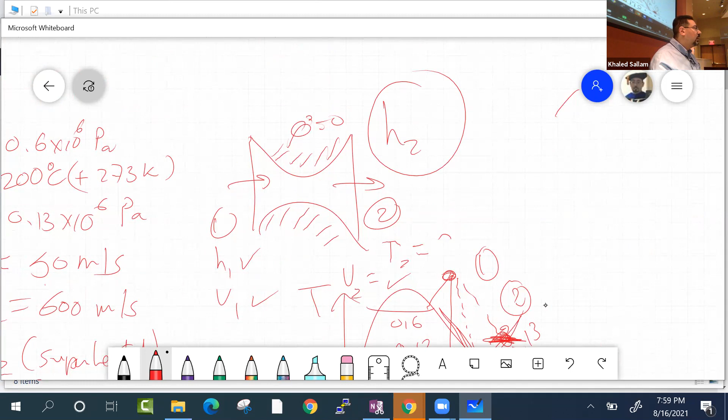Okay, I need H2. I need the enthalpy at the exit of that nozzle. Where can people calculate the enthalpy of the flow? Is it from the equation of state P equal rho RT? No. Is it from the continuity equation? M dot equal M dot? Does this have H2 in it? No. Where does H2 exist?

First law, energy balance. If I say energy in equal energy out, that has H in it. So this equation is probably my last equation. And the equation before that is H2 plus V2 square over 2 plus GZ2 equal, multiplied by M dot, equal M dot H1 plus V1 square over 2 plus GZ1.

What happened to the Q dot? I thought that the first law had a Q dot in it. What happened? Adiabatic. And what happened to the work? I thought that the first law had Q dot minus W dot. Where is the work? Why didn't I write it? Is there any work inside this nozzle?

Do you see a fan propelling the flow in? Do you see a turbine sitting there? There is no mechanical work. Is there electric wire going in and heating or doing electric power dissipation or something? No, there is not. So there is no work on this one. So the first law on this thing is simply Q dot minus W dot, cancel, cancel.

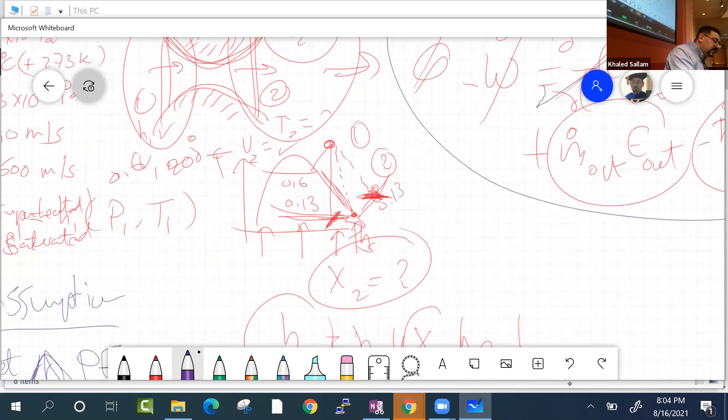So the sad thing is you see people writing this because they copied it from some solution, but when it comes to another problem where there's a heater, for example, they don't know, because they just copied that formula. Understanding where it's coming from — the solution where this came from probably wrote this first, or even better, wrote the full equation first and canceled the unsteady term. That is the difference between a homework problem where someone just finds the formula in the book, and someone who is developing the model himself.

And that's what we need to be able to do by the end of the year. We need to be able to develop the model of any system based on just fundamental equations, no matter how new the system is. Okay, I'll give you more examples later on.

But so now we know this guy, we know this guy, we know this guy — this is the only thing that's unknown. Get H2. So now, with H2 and P2, use the steam table, and you will be able to get T2 — if it's superheated, if it's not superheated, if it's not outside the dome, then you should get X2. So actually, the way you do this is this:

Before here, get H2 and compare it with Hg. If H2 is greater than Hg, then you'll be able to do this. And if H2 is smaller than Hg, then we obviously are wet, in the wet region, and therefore H2 equals HF plus X2 times HFG. Get X2.

And then once you get X2 or T2, you put it in one big box like this. Ouch. You put it in a big box like this, and you are done with the answer. All right.

So I hope I explained how you need to solve the problem backwards so that you can come up with a plan for the equation, for the solution. And this hopefully explained to you the structure that I want to see. I think the sketch, you shouldn't take points off if you don't plot a sketch, but I think you should really make it a habit to always come up with a sketch. And also in the quizzes and the exam, you always need to go step by step. Don't write everywhere — I see that all the time, one part here, one part there. It doesn't work. Step line by line.

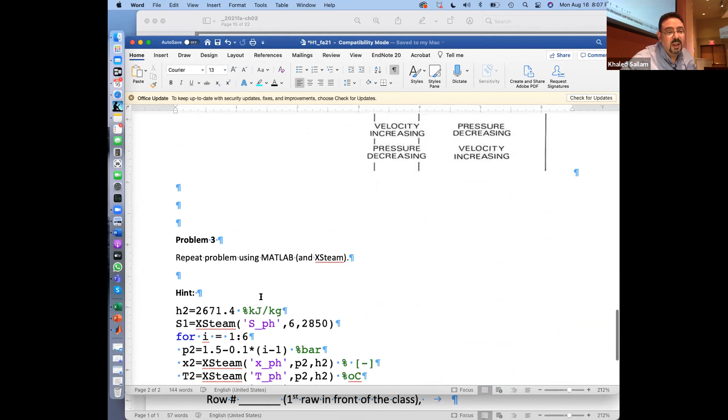Okay, so problem number 3 is asking you to repeat this problem but using MATLAB. So this part, what he's doing is calculating H2. Obviously H2 needs to be calculated from what? From P1 and T1. You need to add one line here, right? That says H1 equals X steam, right?

X steam, and you would call it from H and P and T, right? You give it the pressure and temperature, P1 and T1. And then after that, you will get H2 rather than giving it a number like this. No, H2 will be H1 plus V1 times V1 over 2 minus V2 times V2 over 2. That is the first law of thermodynamics, right?

Now, what is the problem with this? X steam requires H to be in kilojoule. This equation will use V1 in meter. So this equation does not have the right units: joule per kilogram for meter squared per second, and the kilojoule per kilogram. So what should we do? Multiply this by 1,000 and multiply this by 1,000, so that you maintain H in kilojoule and your first law is still correct. Make sense? You may want to take a copy of this.